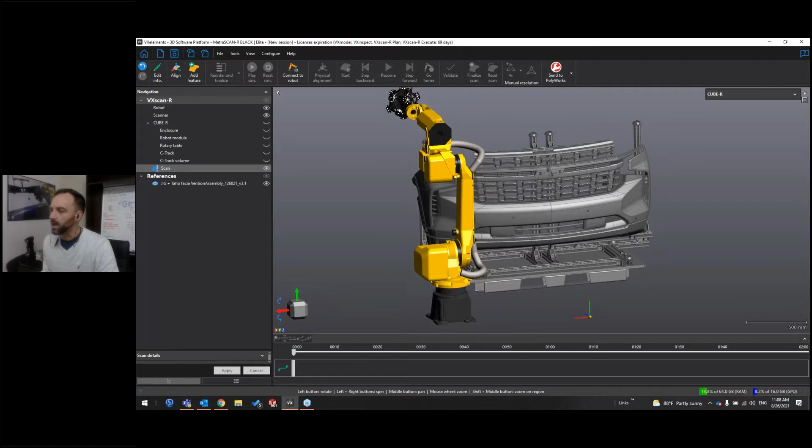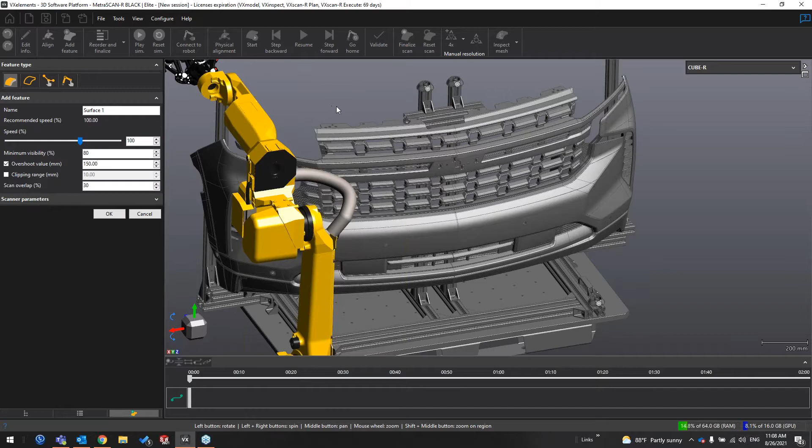All right, so you get a part, you want to scan it. Rather than having to go in and manually jog every movement, VXscan-R gives you the capabilities to not only do that, but be able to use your CAD reference to extract different surfaces or edges to create a scan. So why don't I just show you how I would approach a part.

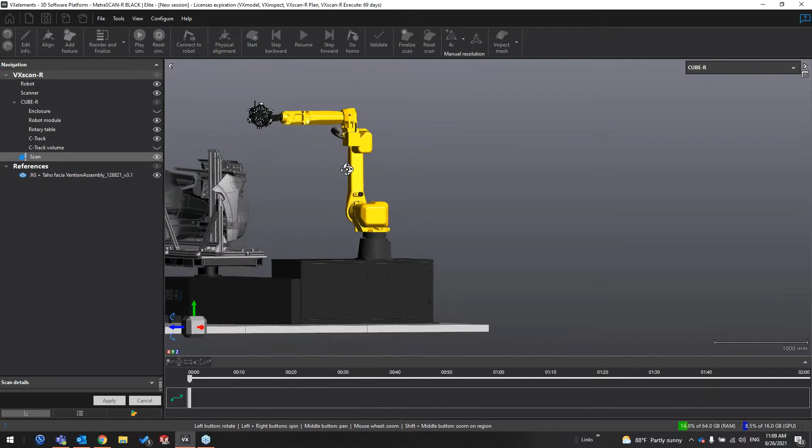The first thing you're going to do is import your reference part and your fixture, which I've already done here. You can also hide and show all the different parts of your environment. So I'm going to leave the scanner and the robot visible just to illustrate what's going on. So with the VxScan software, you're able to essentially simulate your robotic environment. All of the commands that the program is sending to the robot are essentially sent to this digital twin of the robot itself. So you can run simulations pretty easily.

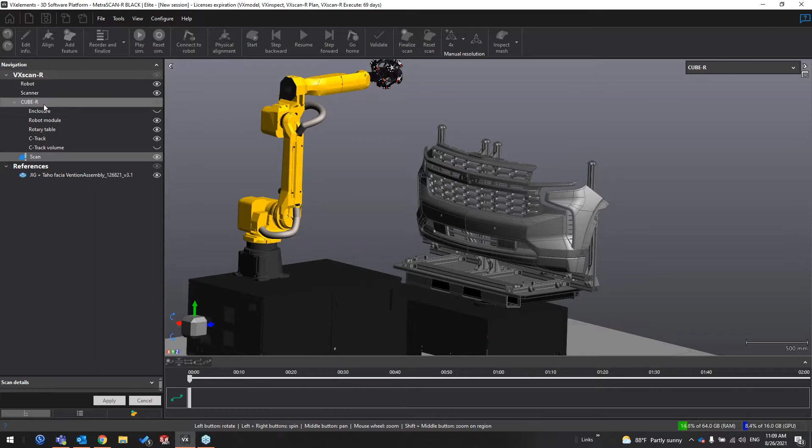So what we're going to do here is, so Tyler has the advantage of sitting in an air-conditioned office and doing offline programming, while the CUBE-R can be running production parts. Exactly.

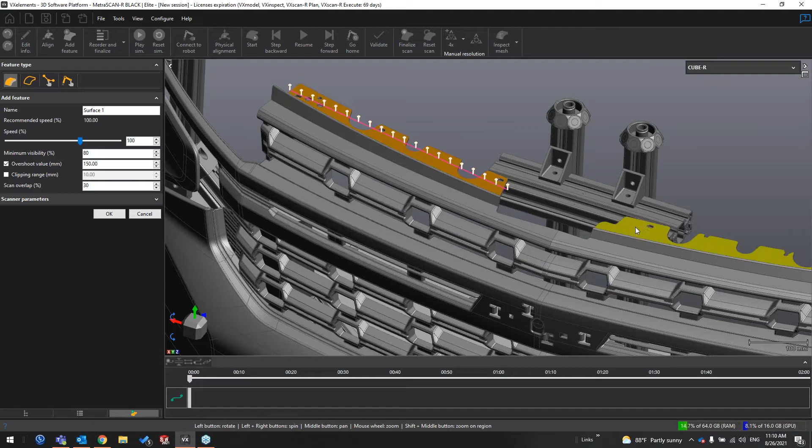So we're going to add a surface feature for holes specifically. If you have a thin sheet metal feature, you want to get that perfect perpendicular 90-degree angle to the surface. That's a best practice with all our scanning devices. So the software, it looks like it's providing that perfect normal by default. Yep.

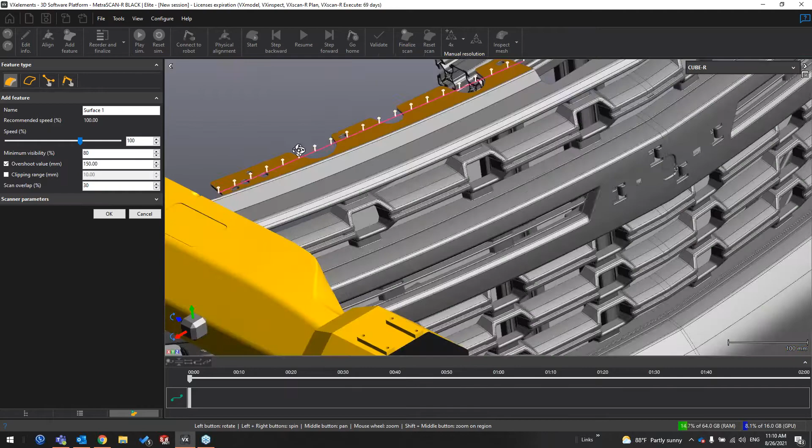So it'll basically take your suggestion. You'll pick a surface and it will say, for this specific surface, we want to scan it at this perpendicular angle. There are some instances which I'll illustrate later where you don't want a perfect angle because you're trying to get some interesting detail. So we'll go over a little bit of how to get those. For the time being, let's just create this here.

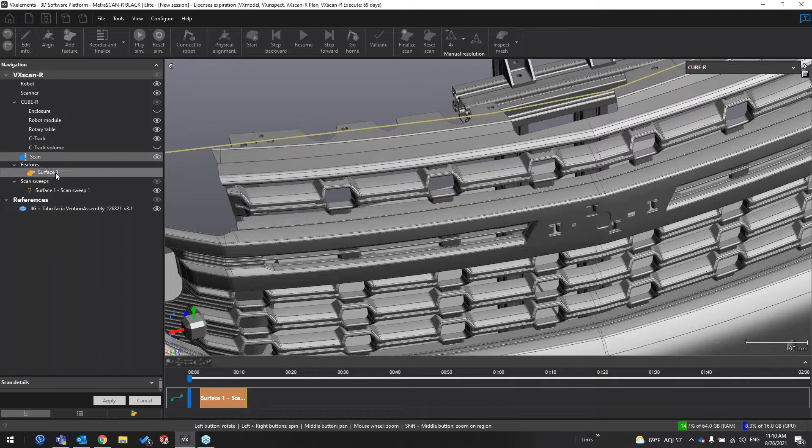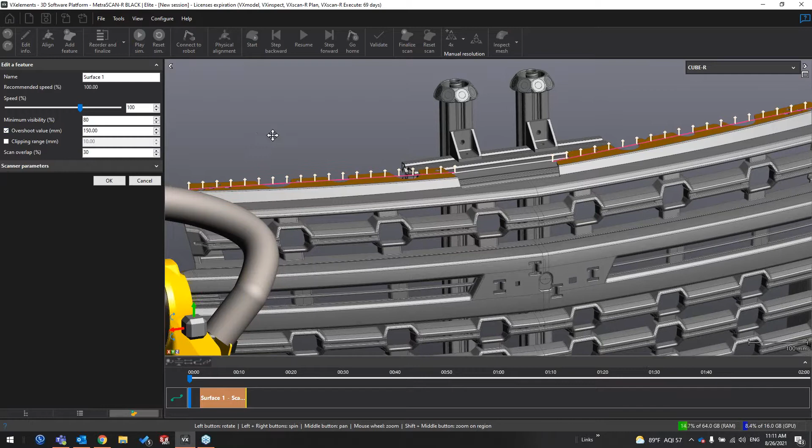And as you can see, we had these two different surfaces selected, but our merging value was set at a point where the two lines would make one scan. I can show you exactly where that was right here. I'll try to get out of this dialog. So yeah, we've got this overshoot value, which helps when you have a scan and you want a little more information over here. You can increase that overshoot value, and that will get them to connect.

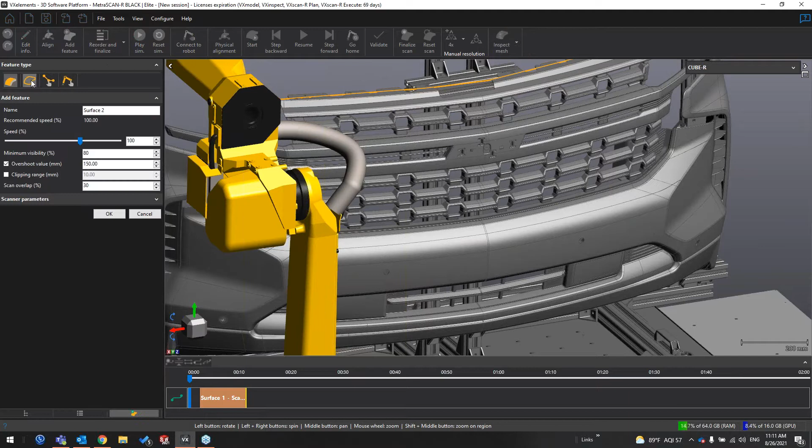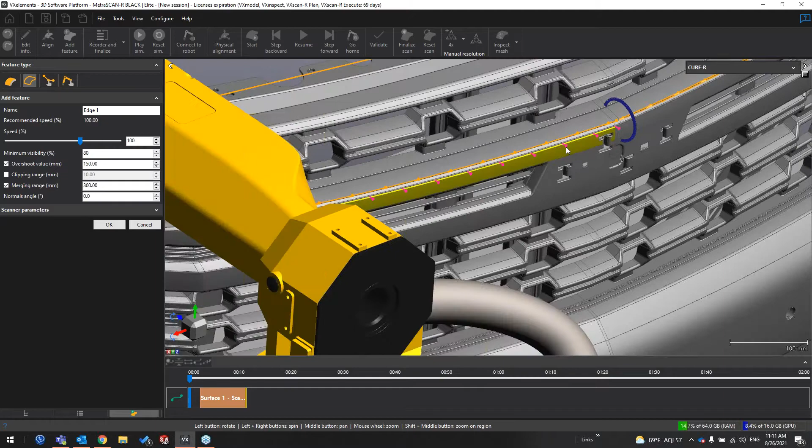So that's adding a feature using the surface feature type. We can also do the same thing with edges. As you can see, anything that is recognized as an edge in your CAD model is capable of being selected. So for this area right here, we could come in and pick these surfaces or these edges. And then if you'll notice, we can have a localized adjustment. So you can change your normals angle.

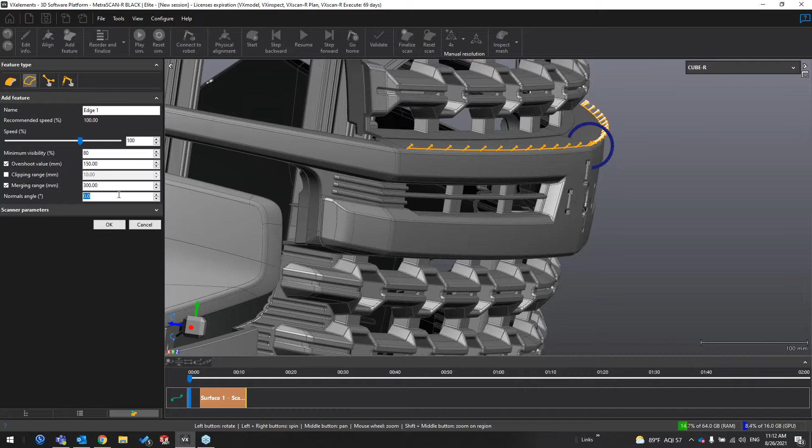If you look at the side and notice your scanner is coming in at a non-ideal angle, you can adjust that right there. If you want the whole line to move, you can adjust the normals angle on this side. So it gives you good flexibility, coming out of the full solution that it gives you and allowing you to change a couple things manually. So we'll create that right there. Very cool. And then let's go ahead and see what it gives us.

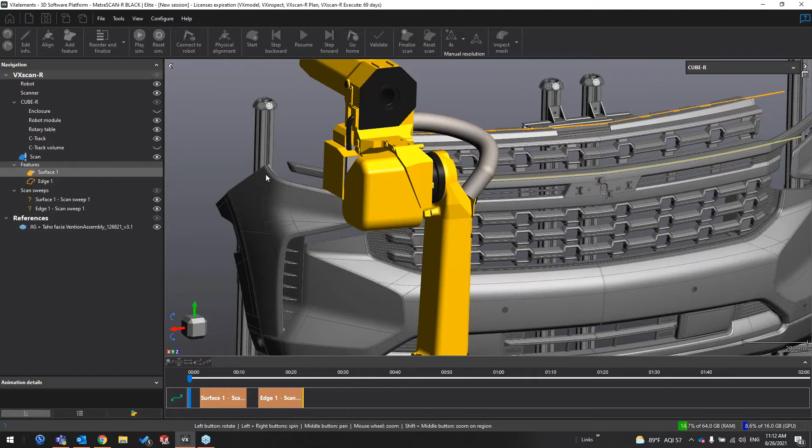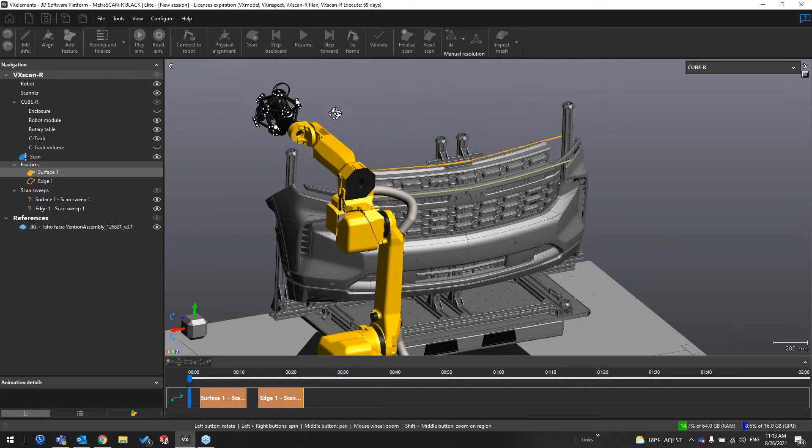So once we add a couple of features, essentially what's happening is we're telling it what features we want to scan. The program is then analyzing those features and deciding the actual path that the scanner is going to travel. This takes into account the reference model that you provide and prevents any collisions from happening. It will warn you if it thinks that there's a collision detected, and it will disable that scan sweep so you can go back in and modify it to get the data that you need.

So we'll go over here and just do a reorder and finalize. So this is when all the smarts come in, where the software picks the best speed based on the resolution, sets up your trajectories and puts them at the proper offset for the best scan, and does all of the collision avoidance.

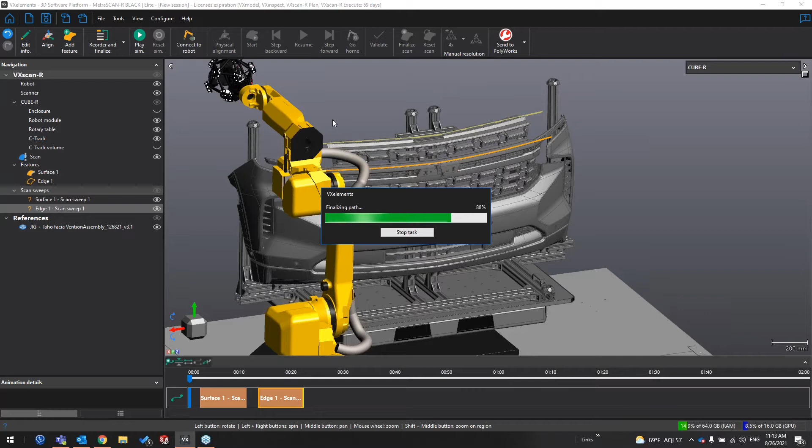Yep. So you've already defined each individual path. What it's going to do here is basically finalize them, lump them all together, and figure out the optimum path to go from each individual path to the next. So it optimizes your cycle time. Excellent. So once you have that, we can do this in a virtual environment basically before we ever do anything. What a great safety feature. Yeah, exactly. And still have the CUBE-R out on the floor running parts.

So Jared, am I understanding this correctly, that basically the guy who would be holding the teach pendant is what we just calculated, the path creation and all the safety and tool offsets, things like that. So that process is now pretty much removed through this VXscan-R? Yes. Yeah, and then I don't have to even know how to run a teach pendant to run this thing.

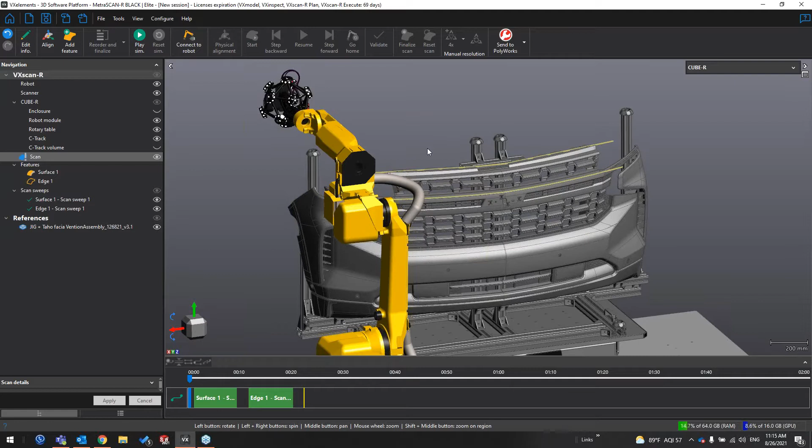Cool. Yeah, personally coming from a CAD background where I had a lot of experience with different CAD programs, it feels just the same as opening up your SolidWorks or your Inventor, and I kind of think of it as video gamifying it. It kind of takes the work out and lets you just focus on getting the details and letting the software do the rest. So can we actually simulate the path on this, or the scan on this?

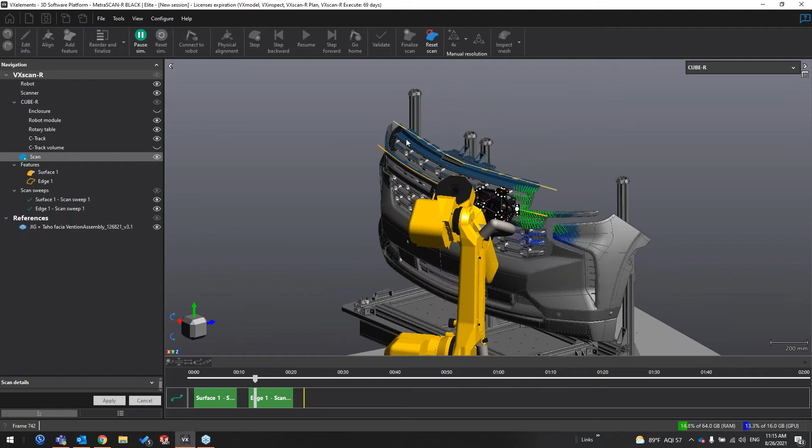So for metrology type parts especially, there's a lot of times where you're not concerned about getting the entire scan of the part. You only need certain key features. So you can come in here, add some scan trajectories where you think you're going to need them. And then it's really nice because you can play the sim and it will show you the scan that you can expect to receive.

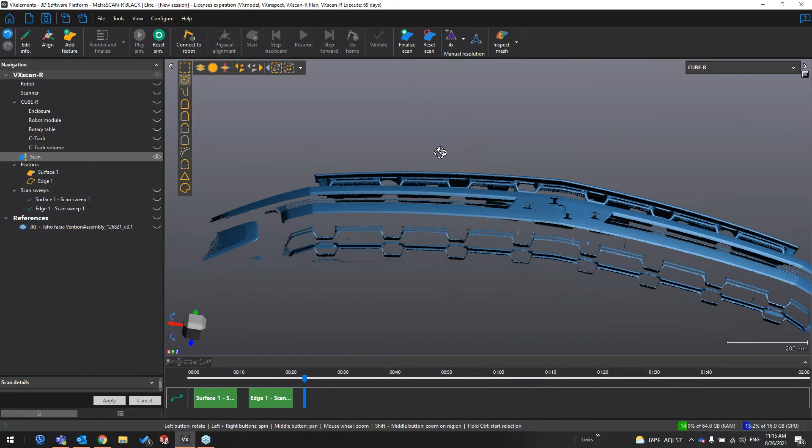So if you make a few scan trajectories, you can come in here, I'll hide my robot and my scanner, and then you can actually just do a show only selected of your scan. So you can have a look at it and see what features you've missed. I like to go through and focus on the details of the part. And then once I know that I have good scan data in those areas, I can come back at the end and just get a more general broad scan.

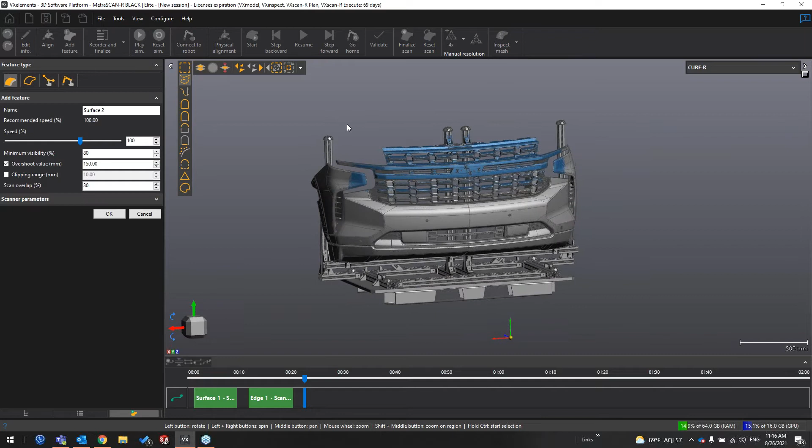Okay, so this looks like a really cool feature, and I'm going to question here and clarify. Sure. Did the CUBE-R actually run and scan this, or is this a digital STL from the CAD for planning purposes? This is a digital STL from the CAD for planning purposes. So that's cool. You could take this model and plug it into your inspection report and basically verify that you again have information where you need it. So can we finalize this and shoot it over to VXinspect or Polyworks? Sure, we can do that.

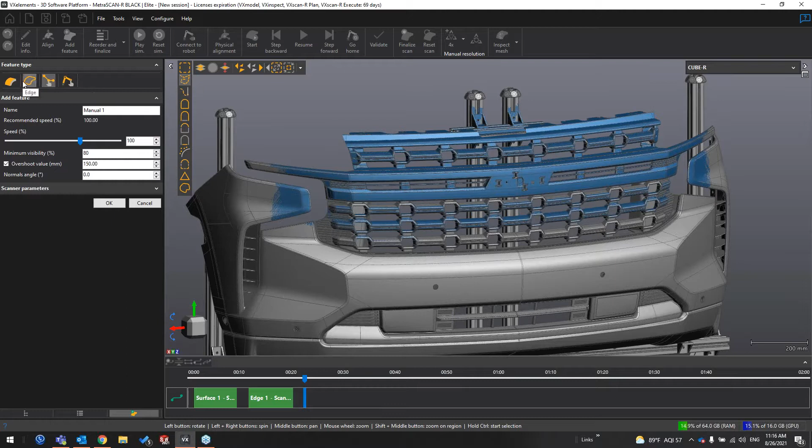While I'm here, let me just show you real quick. So we have the surface and the edge feature, but we can also add manual trajectory. The way you can do that is just adding these lines here. Here's picking points. Yep, you can pick points. So you get a little more manual control as opposed to the surface or the edge.

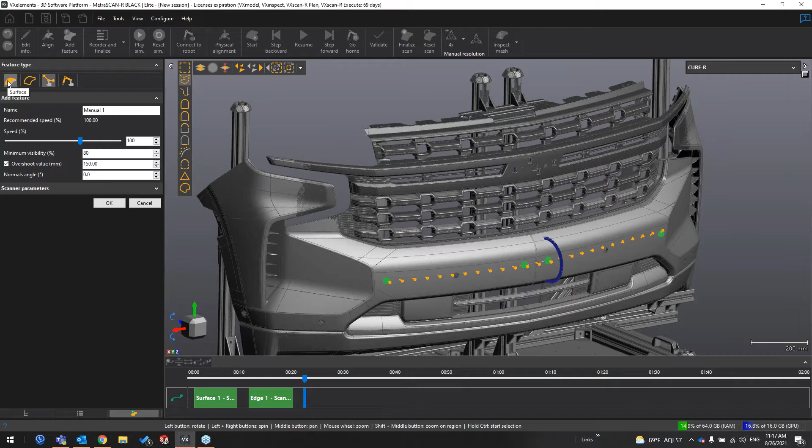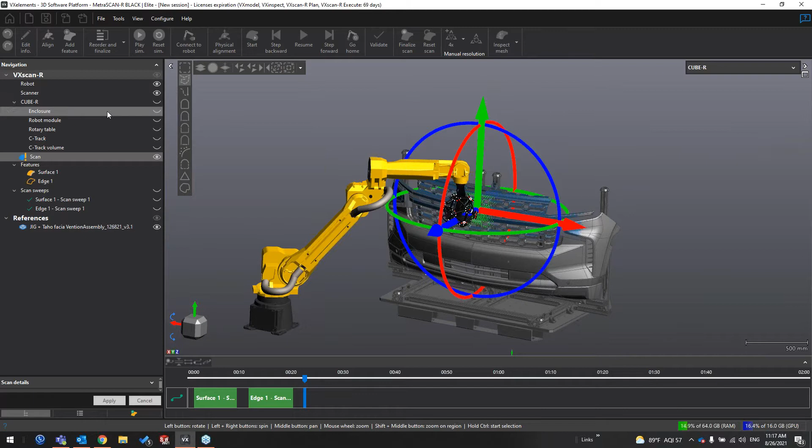But then if you want full control, I just want to tell the robot what to do, you can open up the jog feature, and I'll just show the robot and the scanner to give you a better idea. So you can click on the part and it will turn the turntable and position the robot so that it will be able to scan that position. I'll make that visible as well.

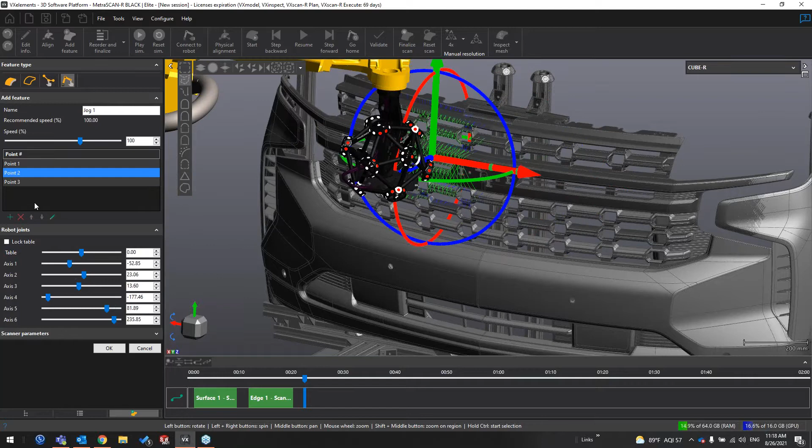So then once you're in here, all you have to do is add a point. You can jog it wherever you want, add another point. Maybe you wanted to go this way, add that point. It looks like it's projecting the scan lasers onto the part to show you your optimal offset distance. Am I right? Yeah, and this is really helpful because you can move it in and out and figure out how deep you can get to get certain features.

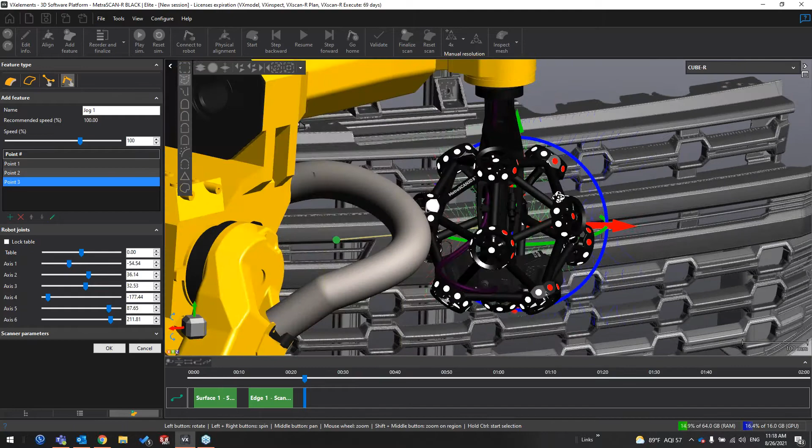Wow. Sometimes there are some strange areas you've got to get into, so you can position it basically any way that you want to. This is cool because this really feels helpful, like you're using an industrial as a collaborative. Yeah, exactly. That's cool. Right, but you don't have to actually grab the robot. You can just do it virtually. Yeah. That's pretty slick. Oh, cool.

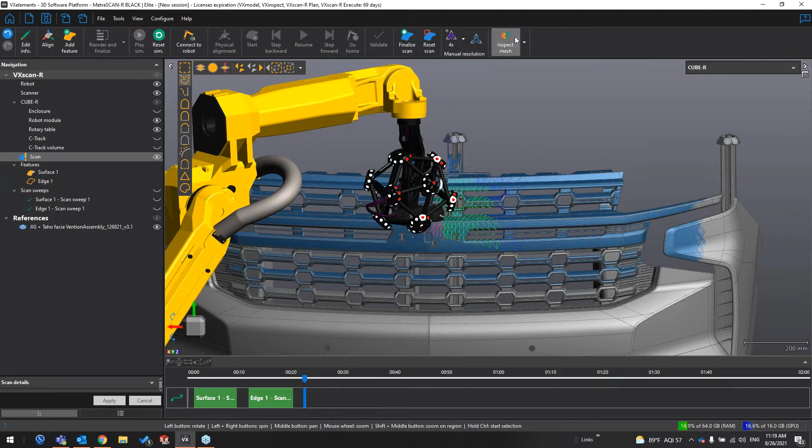So why don't we just take this, and you have the option also to send it to Polyworks. I'm just going to send it over to VXinspect just to give you an idea of what this will look like. Since this is essentially a scan of the perfect part, the color map is actually going to look pretty good. But this will give you the idea of what you can expect to look at. Well, but this helps you prepare your inspection plan too. So sure. So it doesn't matter if it gives you a perfect part.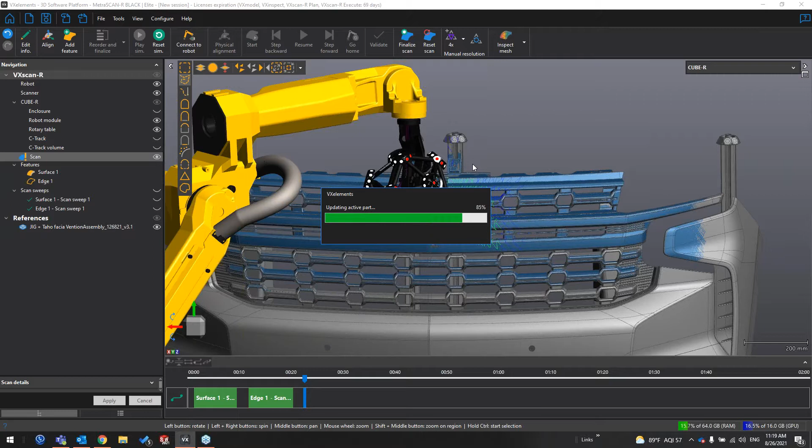And I really like just how clean this interface is. If you have the Creaform software, I'm used to the VXelements interface, this just makes sense. Over on the left side, you have your standard tree that you use and just a very clean, easy interface. So congratulations on that, because this is taking the difficulty for me in the robotics environment and making it pretty easy to see. Sure. And then once we add VXinspect in, like you said, it just pops up in the same navigation tree.

So this again gives us a pretty good part. We're all in the green. You can add annotations for different surface points, true position, call outs, whatever. Yep. So you get your full inspection. Awesome. Just out of curiosity, can I see the holes? Because I know that's something we had talked about. I know that's a big deal when we're looking into the manufacturing environment. Can I see those in this virtual environment here?

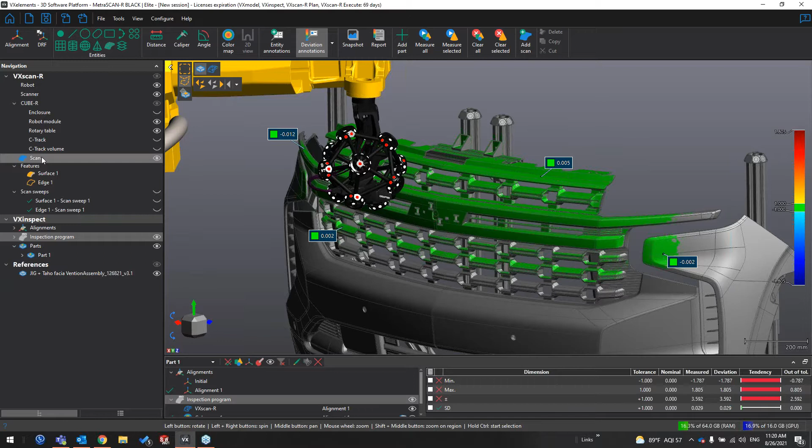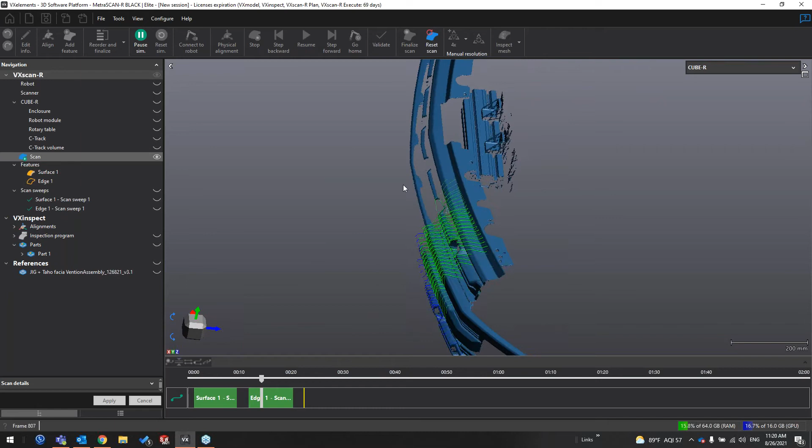So come over here. Oh, actually, I reset the sim. We're gonna have to run this again real quick. See it appear in thin air in front of you, since I have everything shown. So this is showing just what the scanner is picking up, as you can see. I can lock my viewpoint and actually have a look at it while it's scanning. So from the top down here, wow. And I believe this is in a 0.4mm resolution, so I can even refine that. Yep, there we go.

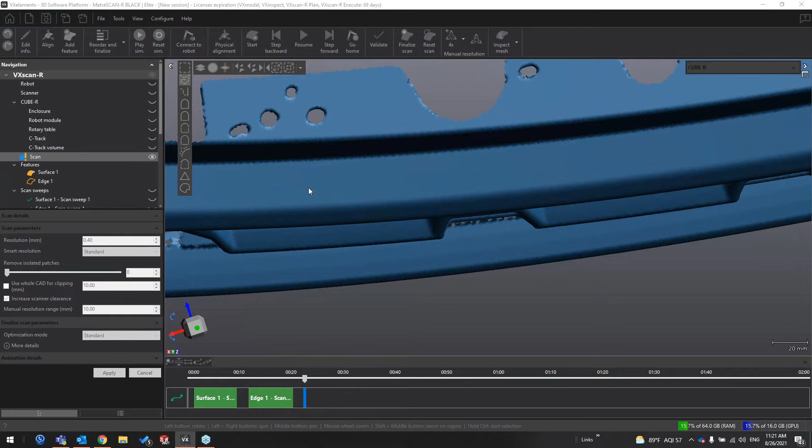When you do that, it will change the scanner to a slower speed because you want more detail. So it will go slower over those areas. Make sure it gathers enough data. And that does that automatically? Yep.

Wow. It's almost making life too easy over here. It's the good old days when we got out there and got dirty, I'm missing that much. I'm sure you're enjoying the air conditioning more than I'm enjoying the heat. I'm surviving in here. Yeah. Who suggested Houston? No, I'm just kidding.

Well, while we're waiting for this, speaking of Houston, can you tell us a little bit about this Houston lab? Yeah, so we're sharing space with another Ametek division in the Houston office. It's right off the Sam Houston tollway, a little north of Katy, Texas. So we've got commercial space here. We've got a couple account managers working from here, ISS, internal sales, marketing folks, and then we've now got 3 application engineers working out of this office as well.

Because we have the Irvine office, which we've had for several years, but this makes it easier for us to get to the east side of the country without having to spend a full day on a plane. So this has been a great space for us, and having the capacity to drop our CUBE-R in here.

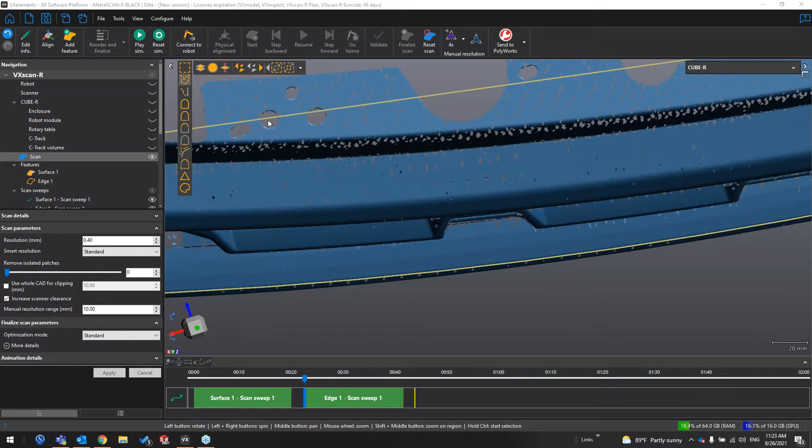Wow. But yeah, so this has been good for us to have this office here. That's really cool. With this CUBE-R, this is kind of a standardized product. So I'm assuming that because it's that way, it can then be deployed to multiple locations with an exact, I guess, CAD run. What do you call that?

Well, yeah. So the CUBE-R is a standard product. So it's the same product if you buy it in Mexico or Germany or Italy or China or Japan. And it makes the deployment easier for international companies. So they're not having to work with different integration partners across the globe. They can work directly with Creaform or our reseller partners there, because we're all supplying the same product.

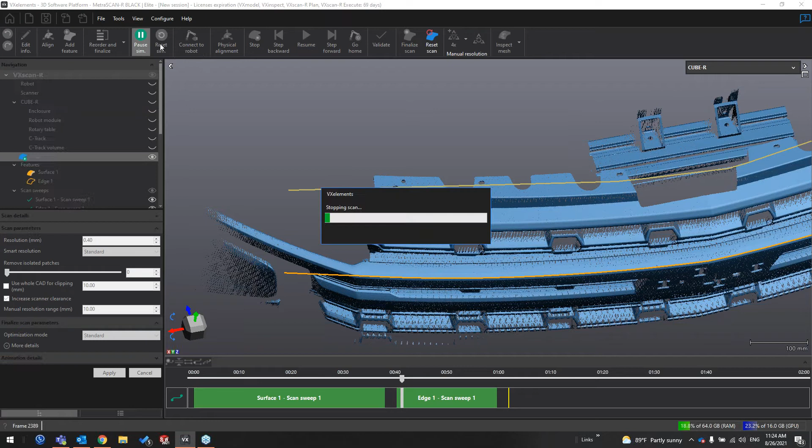Excellent. And so in theory, maybe it's not in theory, in actuality, you could have somebody programming in the US and sending that program out to your satellite systems in other countries. Yes. That's cool. Yeah, and they just have to do an alignment adjustment to make sure that where they said the part was virtually, it is physically on the turntable. That's really it. It's part of our software too.

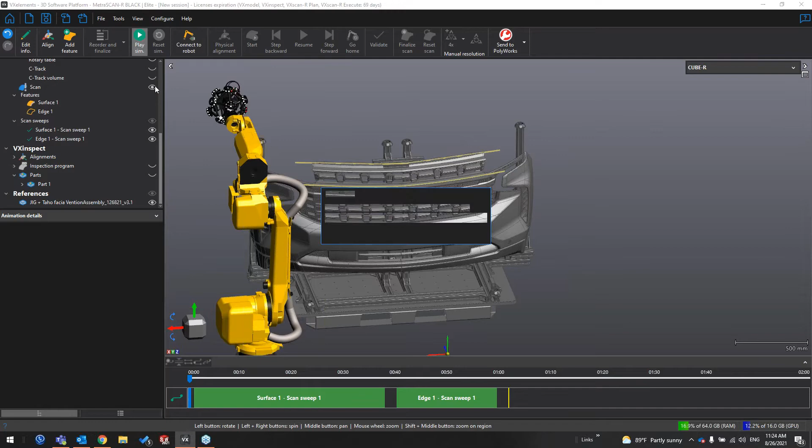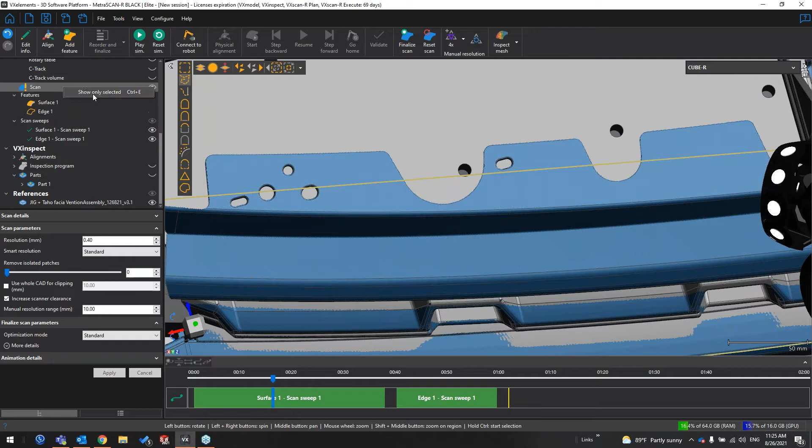I think we could take a closer look. I guess Tyler's still rescanning those holes with a better resolution. So I can just pause it there and we can have a look at it real quick. Okay. There you go. Nice.

You can go through and look at those features, and you can tell right off the bat, my resolution's not high enough, my scan speed's too fast, and go back in here and just custom tailor it to each individual part. And then once you have the scan profile set for a part, you can just load a new part into the cube, hit the button, and see where it lands. So this has all been done digitally so far. Can we see the thing actually run?

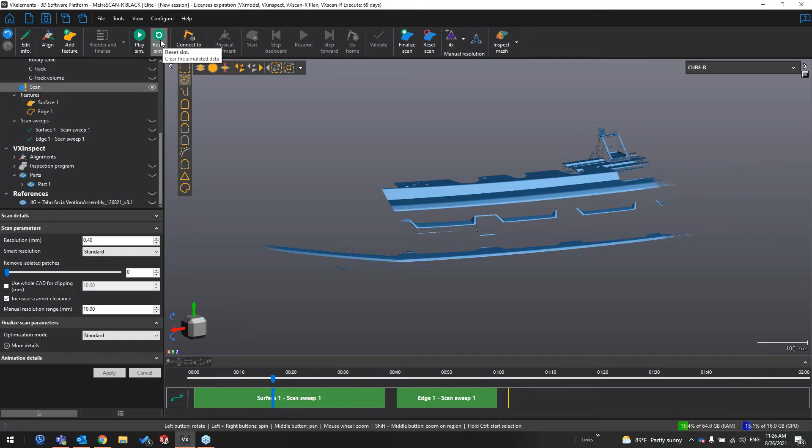Yeah, sure. So once we're done with this, we actually have a scan profile already set up out of the cube. We don't have our network drives here set up in Houston, so we don't have that easy step, but the file sharing is extremely easy. We've got a full program already set for this. So all you got to do is click connect to robot, and then you're able to send your scan trajectories and profile to the cube. We'll send it on out there.

So Jared, are you there? I don't see you on the screen. Oh, I have to click a button. Sorry about that. You're good. Okay, I think I'm here now, right? Yep, there you are. Okay, excellent.

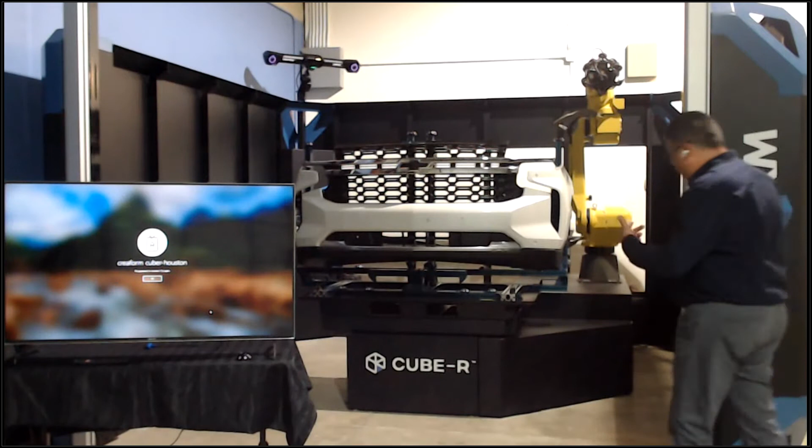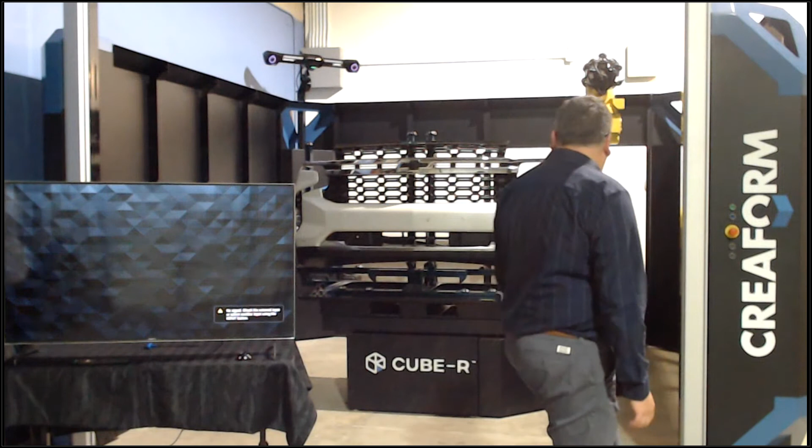It's hard to see, and I don't have a good setup with the camera, but we have a pneumatic connector on the MetraSCAN that will grab the calibration bar that's seated in the back. And we also have a calibration plate that can be pulled out, so you can run an automatic calibration each day, or as needed. So it's quite nice for that. So we've got the automatic calibration. We've got the automatic photogrammetry, which is another thing.

So those pucks that you see on there, instead of having to shoot that fixture with a photogrammetry system separately, we can just load it in and rotate it and capture the positioning targets on the fixture. So that's a real fast process as compared to systems that have to use a manual photogrammetry system. I really like that, Jared, that automatic photogrammetry. I know that's been added also to the manual system, which I played with a little bit. But you also get that dynamic tracking from that photogrammetry shoot, correct?

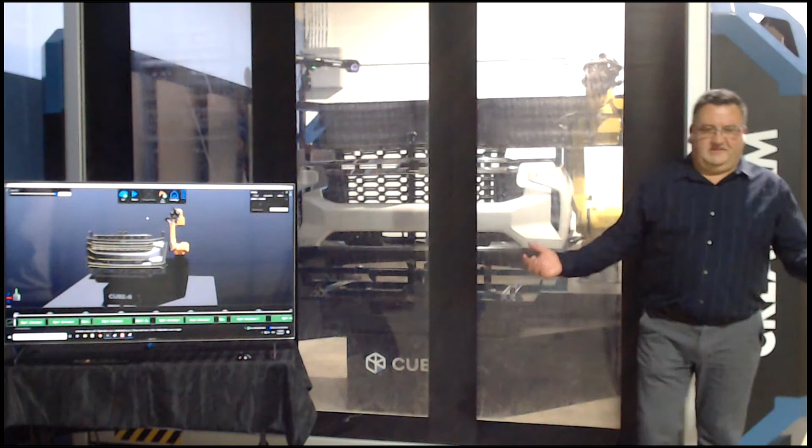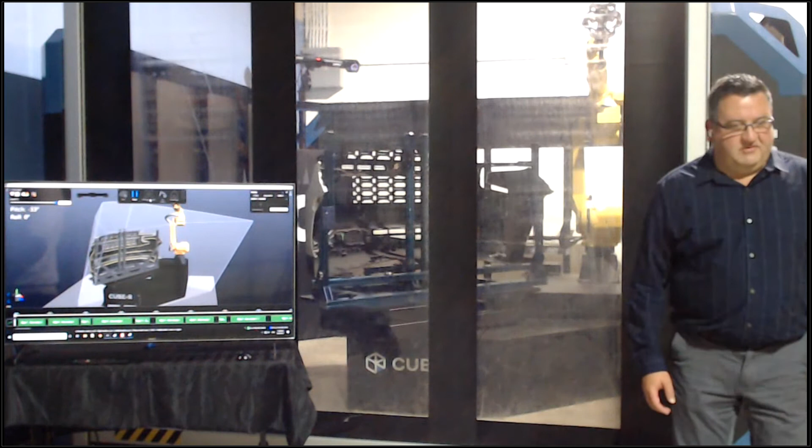Absolutely. And that's why we can certify our accuracy. It's 17025 certified in a lab, and it's VDI/VDE 2634 Part 3 certified as well. And like I said, it doesn't matter where it sits in your environment. It could be sitting next to a press that's operating or a machine that's running. Fork trucks can drive by. You're not going to lose your accuracy. And it looks like Tyler's got this started running. So this is probably as good a time as any to take some questions from our audience.

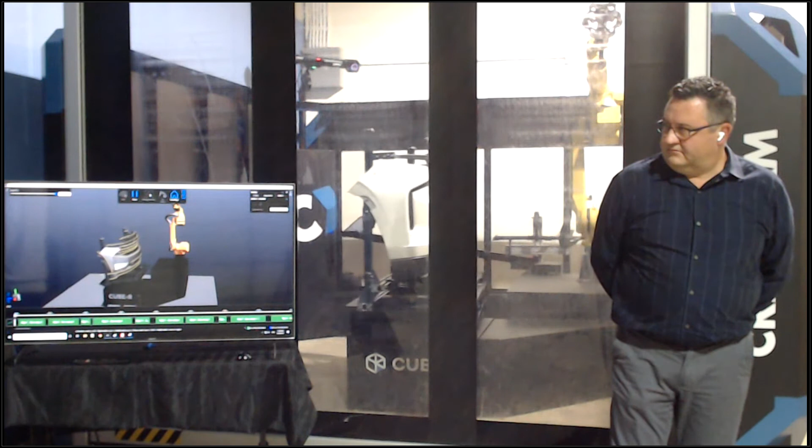So I'm going to start with the first one that we have. I think this one might be for Tyler. How long does it take to learn how to use this system? Yeah, it's going to be different for everybody, but like I said, I've got quite a bit of background in CAD. I've done a lot of trainings with people who don't have a lot of background in CAD. Once you learn the basic controls and the interface, it's extremely user-friendly. You can kind of fumble your way through it the first day, and by the next day you'll be extremely proficient at it.

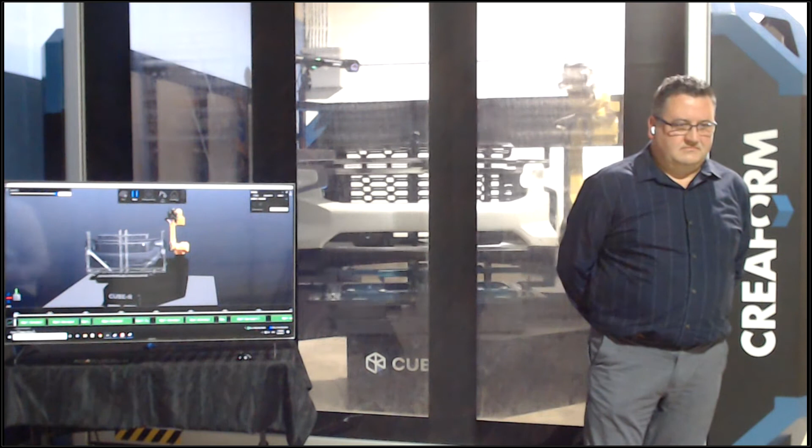Like I said, you've seen how user-friendly it is. You're able to use your CAD model directly as a reference. We prescribe a 3-day training session for it. So for me, I have a little bit of fear playing with a robot. I'm not used to robots. I'm not super comfortable with them. But from what it sounds like with this collision avoidance implementation and all of that, it's hard to do something wrong on this system.

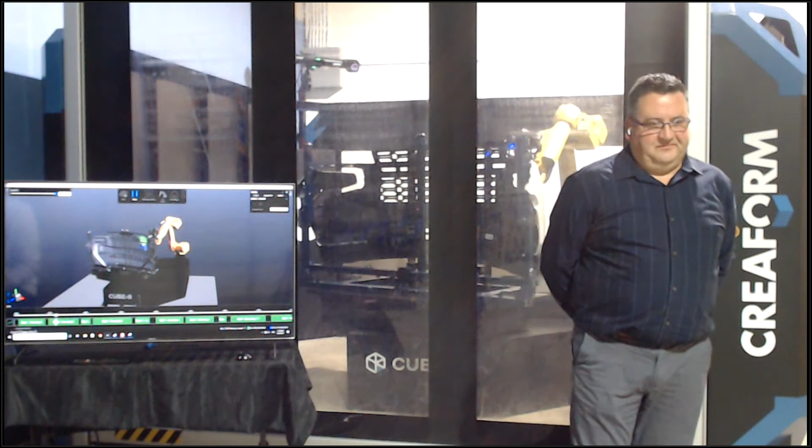Exactly. And we also have an option for asset protection where we can actually store the configuration of a fixture, meaning the target configuration. So that way, if someone loads the wrong fixture and tells it to use a different program, we will protect the user from running that wrong program with the wrong fixture. Very cool, I like that. We're just using the targets to identify it, which makes it really easy. So all I heard was I can't mess it up. Exactly, you're correct.

Talking about questions, I have another one here, maybe a question in 2 parts. I have questions about the maximum size of the parts to get measured, and what happens if my parts are too big to fit in a cube. So JD, you want to take one? Well, I'll answer the size. The part size for this is about 10 foot wide and I think about 10 feet high. Obviously you're probably pushing the envelope and doing a lot of turntable moves with that single robot. But if it goes beyond that, I'll let JD answer.

Sure. I think this is where it comes into more of our strength, which is a custom type of system. The CUBE-R is utilizing the MetraSCAN-R, and the CUBE-R is a full package of that with the FANUC M20iA, I think. So it's using that industrial arm, where some of these custom applications that we use are inline systems where they need that cycle time, 100% of the parts, they don't want anybody touching it, automatic feed, automatic in and out with a yes/no signal. Or for the size, you might need a custom gantry that would go all along the side.